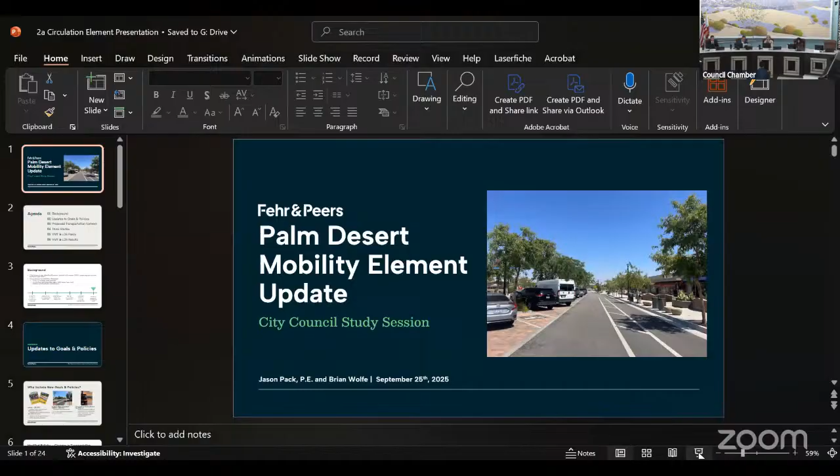Thank you, Madam Mayor, members of the City Council, Carlos Flores, Development Services. Before I turn it over to our consultant, Fehr & Peers, today you're going to receive another update on our circulation element update that started as of July of last year. The City Council has received a couple updates back in February as well as June, and then our Active Transportation Program Subcommittee reviewed some of the documents in front of you earlier this month. So I'm going to turn it over to Fehr & Peers to go over where we're at and some updates for y'all.

Awesome, thank you Carlos. Hello Council, my name is Brian Wolfe from Fehr & Peers, joined also with Jason Pack. We've been working with the city together over the last year on the mobility element update.

To give an overview of our presentation here today, we're really summing up our work over the last year on this effort, looking at the different improvements and alternatives as part of the transportation system. We're going to go over the key updates and changes to the goals and policies, and the mobility element will then touch on the changes to the transportation network, including some capital projects included in the long-term plan for the city. We'll also touch on truck routes, VMT, and level of service, which are three policy areas that are key to mobility.

For some background, we've been hard at work over the last year with the city, coming up with different alternatives to the transportation system, going through an extensive analysis looking at how this affects traffic congestion, vehicle miles traveled, and other key metrics. And now we're at the final stage where we're looking at CEQA and further adoption going into the fall.

There's three main motivators for this update to the mobility element. The first is really getting consistent and cleaning up a lot of the roadway cross sections. In the current mobility element there's some inconsistencies, and we want to provide a clean vision for long-term planning and potential roadway improvements in the city. Secondly, tying in all the recent plans that have been adopted, such as the ATP and the Vision Zero plan, and memorializing those in the mobility element. And finally, addressing those legislative requirements that have come out since 2016.

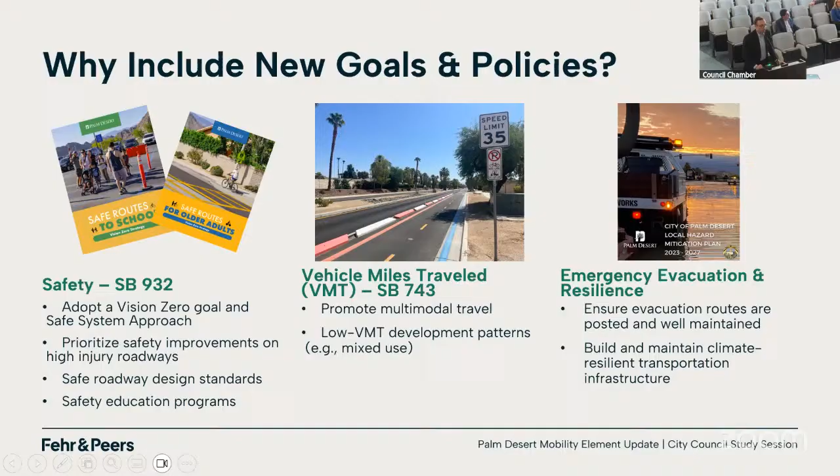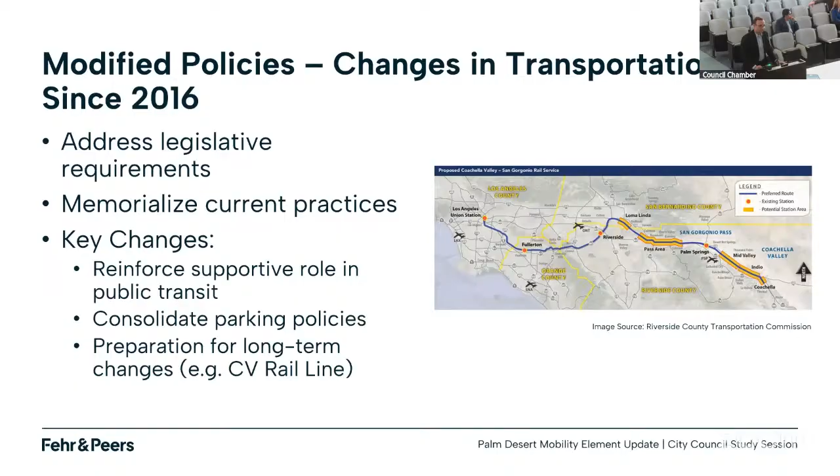Some other key changes to the transportation mobility element in the general plan, again, really just to address those legislative requirements and memorialize the current practices in the city. Some of the policies were outdated. Some of the key areas we wanted to upgrade were the public transit section, really reinforcing the city's supportive role in providing transit and connecting and coordinating with Sunline on that, consolidating some of the parking policies from the last mobility element, and then finally preparing for some of the long-term changes that we anticipate with transportation, including the CV rail line.

So next we'll jump into some of the key changes to the transportation network. This is the roadway system, the bike and pedestrian circulation, as well as truck routes. So first, why are we updating the transportation network? This is really an opportunity for us to review what the plan is in place for the city and help right-size our network for the future.

For example, we looked at some roadways that maybe were planned to be widened in the future. However, with current development patterns or changing priorities, including focus on walkability and downtown, this is an opportunity to right-size and update our plan accordingly. In addition, this is also a great opportunity to review some of those long-term projects, including the Portola interchange, which we've come to council on previously, and incorporate that as part of a long-term priority. We'll touch on that in a little bit. Also addressing some growth, and consistency with the state laws and policy goals that council has put forth.

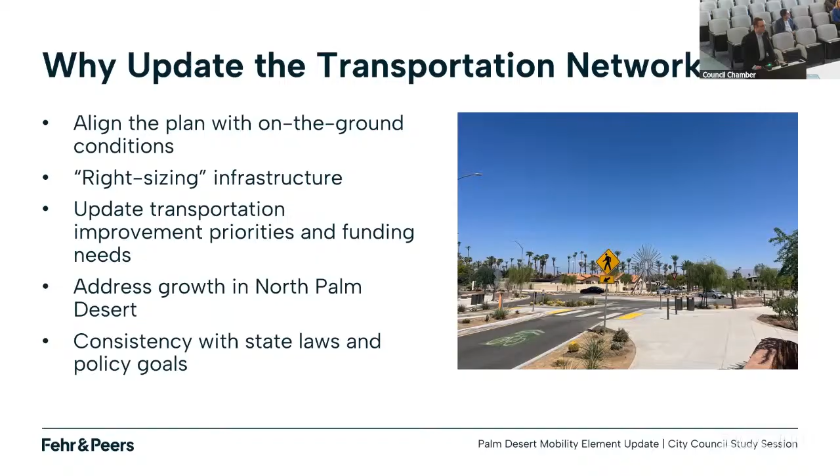So speaking of the Portola interchange, this is something we gave an update to council on in June. Just a reminder on the current status: all the design work, all the planning work has been completed, and there's just a need for additional funding to complete this long-desired project, which is looking at around $88 million in 2018 dollars. We did receive direction from council to include and continue this project as part of a long-term vision for transportation, so it is included in the draft updated mobility element here.

Some of the next steps as part of this, and that are incorporated into the action items in the mobility element, are just to review the cost estimates and costs for that project, as well as start pursuing and coordinating with agencies to find potential funding sources.

So why are we including the Portola interchange? As a reminder, it's an opportunity to help relieve congestion at Monterey and Cook Street. This is something we identified in our traffic modeling through the general plan update as a key priority, and this is one solution to address that. The next thing is really just to align with some of the state goals to reduce VMT, as it provides a more direct path of travel while also accommodating growth. And this is a project that is more likely to secure funding for improvements, as it reduces VMT and is in line with a lot of those state goals.

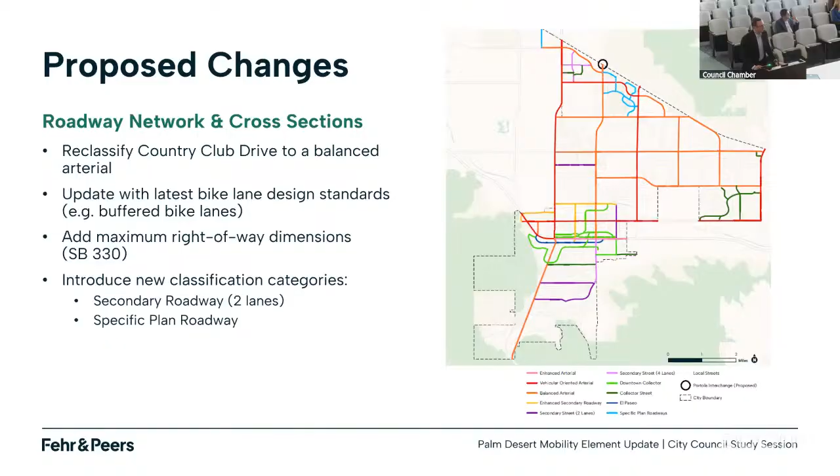So for Highway 111, we did look at potential improvements for this corridor. Based on the current mobility element that we're planning, the draft one that we have before you, there is a desire to provide complete street improvements along this roadway, including safety improvements for all users, potential for enhanced bike facilities, support for transit, as well as activating the frontage road. We have two potential design examples. These are very high-level planning, and it is the city's intention to refine the Highway 111 design further down the road through a more collaborative process with the community.

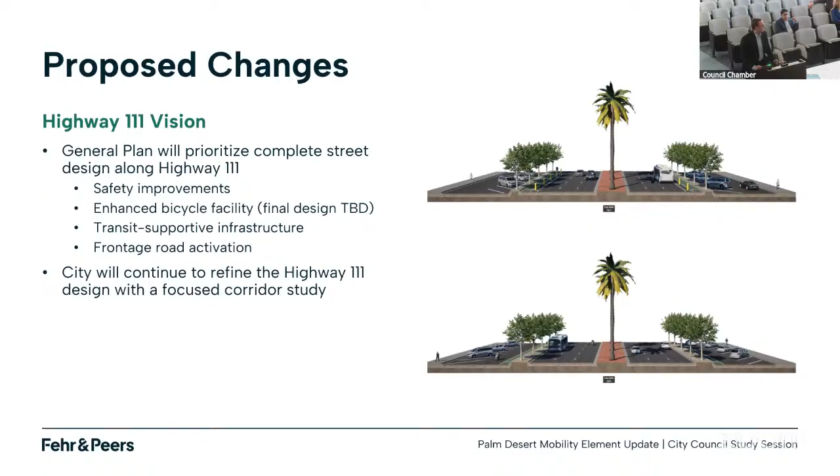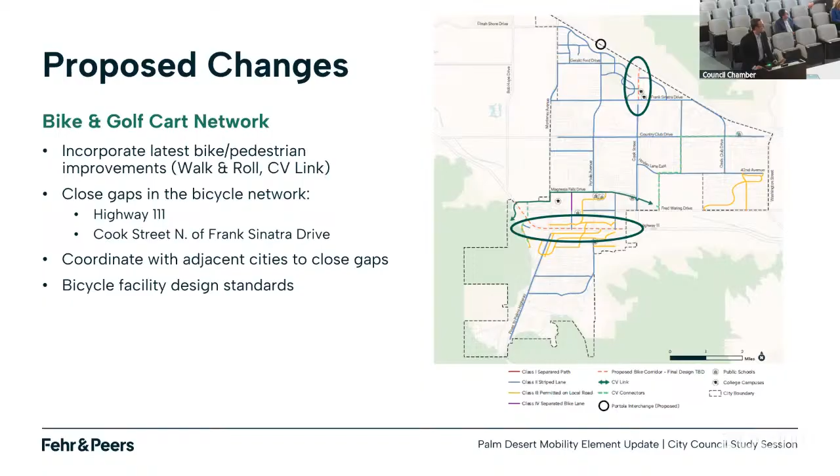Regarding bikes and golf carts, the focus of the mobility element update is to incorporate the latest progress since 2016, including all the new bike lanes that have gone in, CV Link, and other big projects, while also identifying the next gaps the city desires to close—specifically Highway 111, as well as Cook Street north of Frank Sinatra by the college, and the proposed rail station.

Our next topic is truck routes. This is a new topic area in the transportation mobility element, tied to new legislation, AB 98, which requires all agencies to adopt truck routes and incorporate them into their circulation element by 2028. This is a perfect opportunity to meet this new legislative requirement.

As far as where these routes should go, they should avoid sensitive receptors where possible, such as schools, parks, and housing. We did an extensive analysis of where these receptors are located and made changes to the truck route network. Some other changes are focused on addressing safety and past crash history with trucks specifically.

So the proposed changes—I'll list them here, and I also have a map on the next slide we can look at side by side. Some of the big changes are removing San Pablo Avenue; this was previously adopted by council but will be formalized in the mobility element with this update. Also removing SR 74 south of Highway 111, an area with a lot of crash history with trucks. Another change is removing Portola Avenue south of Frank Sinatra, where there are a lot of schools and other sensitive receptors.

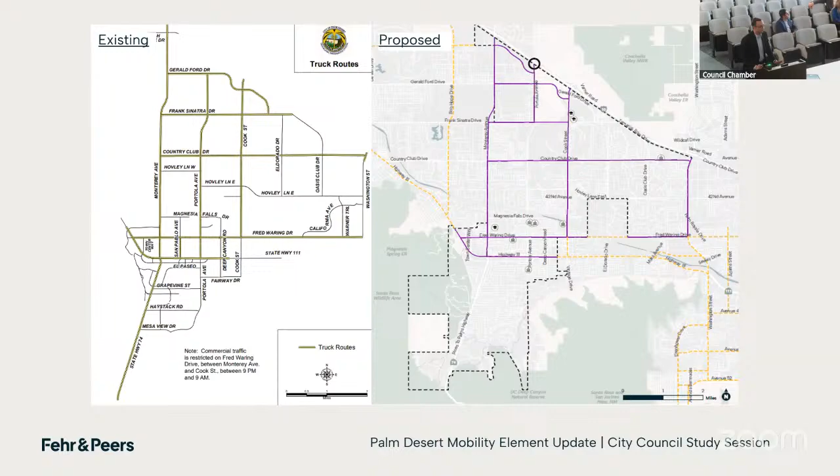This map shows the side-by-side existing and proposed truck route network. Again, those big changes are along Portola Avenue as well as SR 74 south of Highway 111. This network still provides some regional connectivity for trucks to navigate throughout the city.

Our final topic before we open it up to questions is related to VMT and LOS, everyone's favorite two acronyms in transportation. Why are we addressing these two metrics? They're really helpful for a lot of long-term planning decisions for the city, and they're also used extensively in the development review process.

First, level of service. This is a metric used to describe traffic conditions and help identify congestion hotspots. It's a local planning decision. It used to be incorporated in the CEQA process; however, it's no longer used in CEQA, but it is still being incorporated in the city's transportation study guidelines, which are part of the mobility element update. Level of service is a letter grade system based on average delay, and we use that information to help identify hotspots of congestion and potential improvements in the future.

With CEQA and the changes post SB 743, we have another metric called vehicle miles traveled, or VMT, which measures the overall efficiency of driving. It's essentially a sum of the total number of miles driven by vehicles—you can look at total VMT, the total amount of driving within a city, or the amount of VMT generated by a particular project. More often, it's looked at as an efficiency metric, VMT per resident or VMT per employee. This helps evaluate how potential changes to development or the transportation system influence how much or how long people drive, and it's now the new metric used for transportation impacts in CEQA.

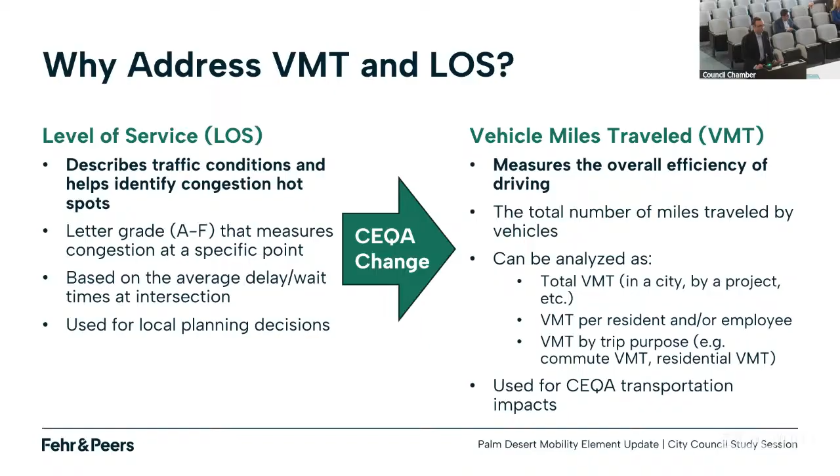So as far as this process, the mobility element provides an opportunity for the city to adopt city-specific VMT thresholds and guidelines. There are several key reasons why this is helpful. First is defensibility in the CEQA process. By having local guidelines, you're able to help streamline development in the city. This is also helpful to account for some unique uses, like our higher rate of tourism, so guidelines can reflect some of those unique development patterns.

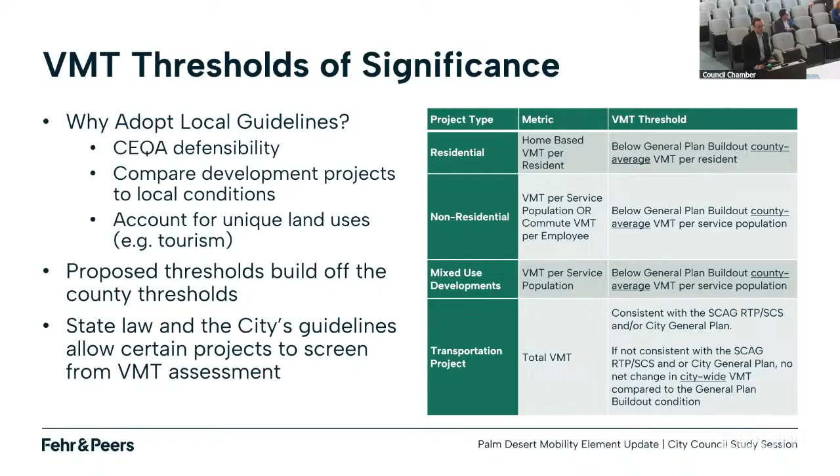A big thing to note about the VMT guidelines we're proposing is they build off the current practice the city is using, which is tiering from the county guidelines. So we're essentially memorializing that process for the city, while having a few slight clarifications on how to analyze more specific projects related to tourism and other cases. Also, state law provides opportunities to screen projects from VMT analysis, and those will be incorporated into the guidelines as well.

For level of service, now that LOS is a local planning decision, there is still a desire to maintain it in the city's plan, as it can help guide road improvement decisions. It's also an opportunity to help manage the existing transportation system and look at ways to invest in existing infrastructure and optimize the system before necessarily expanding roadways.

By and large, we're proposing to keep the LOS policy the same by having an LOS D threshold during the peak hour, meaning intersections should operate at a D grade, around 55 seconds of average delay or better. In the downtown area, shown there in orange, we do have some opportunity to provide flexibility by allowing an LOS E threshold, accepting a little more congestion where it's expected and where widening may not be feasible.

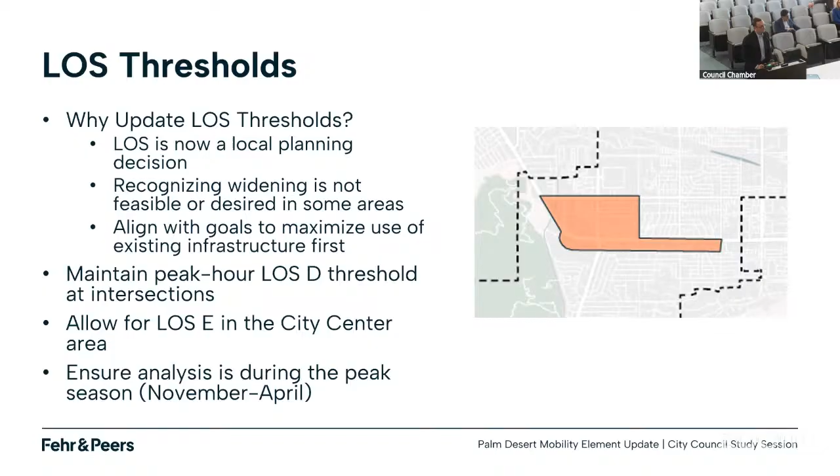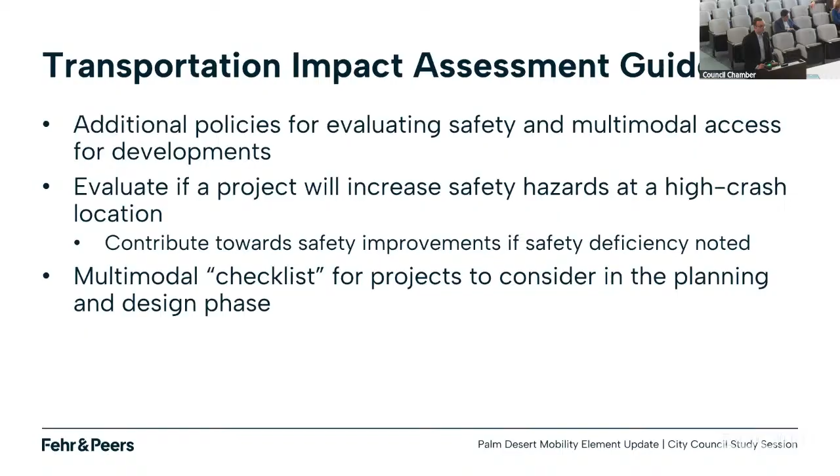Another opportunity with updating the transportation study guidelines is incorporating other goals and policies, specifically around safety and multimodal access. With safety, projects will evaluate whether they increase potential safety hazards and contribute improvements to the roadway system if they are found to increase those hazards, and also evaluate how bikes, pedestrians, and transit users would access future development.

The last slide here before next steps is how the mobility element update influences VMT and LOS within the city. With VMT, the proposed transportation improvements, most notably the Portola interchange, are found to reduce the overall amount of VMT taking place within the city. This is primarily due to shorter trip lengths—when you provide an additional freeway interchange, people have a more direct path to travel. We see around almost a 1 mile per person decrease in VMT as a result of these changes.

Next, with level of service and traffic congestion, we again see with the Portola interchange that traffic congestion improves at the Monterey and Cook interchanges, while also still accommodating planned development. One thing to note is that near the city center, we do still anticipate some congestion—it's currently there now and probably expected to grow a bit in the future. We recognize that widening may not be feasible or even desired in this location.

So next steps: we're currently working through the CEQA process. Most notably, we're consulting with adjacent tribes about the potential changes taking place with the mobility element. That effort is wrapping up soon.

Our next step is to go through formal adoption with council, adopting both the updated mobility element—which includes the goals and policies, as well as the roadway reclassifications and truck routes—and along with that, the transportation study guidelines, including the VMT thresholds, level of service thresholds, and other safety and multimodal assessment processes.

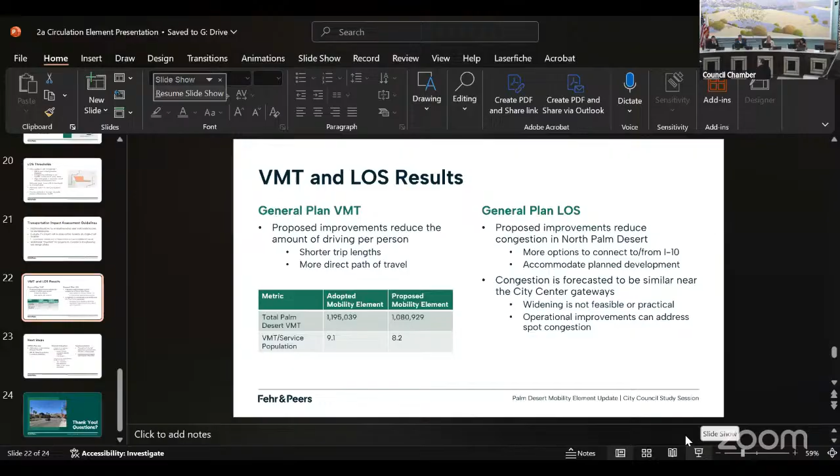Do you have another question? Yeah, one other question - the slide right before next steps. In terms of results we're coming up with for helping with VMT and the LOS, it seems like we're relying on the Portola interchange to resolve a lot of this.

Correct, yes. And in 2018 it was 88 million, so we've had inflation. I'm going to say that number could well be 130, 140 million. The last time we talked about it at any of the CVAG, it's maybe more than 150. So we're at a loss, as far as I know, on how to get funding for this project.

The city itself - unless I'm missing something, I could ask our city manager or our finance director - but it's a dream right now and not a solution.

Yeah, and as we heard from council in June, it is one of those dream projects, and that's why our discussions with city staff have found it valuable to include in the mobility element as a long-term priority. When the project is in the mobility element, it's very clear the city wants this project, and it makes it easier to go after those potential funding opportunities. So one kind of has to come before the other, and we lay out implementation actions so the city can focus on finding opportunities to engage with CVAG, RCTC, and other state and even federal representatives about funding for this project.

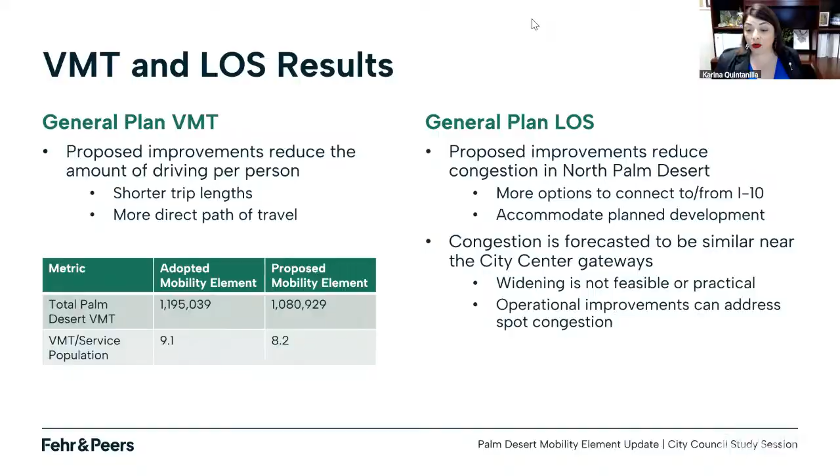Thank you. And I know Councilmember Quintanilla, you had put your hand up. Yes, thank you, Madam Mayor. Just two quick questions. One, what is the weight threshold to have these restrictions apply to trucks? I don't know that number off the top of my head, unfortunately. I don't know if Jason does.

I'm sorry. And the other one in the meantime is how are you collecting the data on how long it takes for a car? Are you using the CV Sync data, or how are you collecting the time that cars are waiting? The travel time?

Yeah, so a lot of that is based off of established analysis formulas in the transportation planning practice. So as part of this effort, we collected a lot of traffic data. How many people are driving on the road, and we use that information to assess how well the system is performing and estimating that average delay. So, and that does incorporate the CV Sync effort that is underway. So any of those improvements, we did see some notable improvements in travel time.

So just to answer your question about truck routes, one of the ways to address truck routes would be to enforce a weight restriction on roadways. In fact, I'd suggest most of the agencies that we're working with are finding that as the easiest way to enforce trucks. So that weight restriction can vary depending on the type of truck that you're trying to restrict on a specific roadway. So if you want a single unit, like a moving truck, to have access for local deliveries, that weight would be very different than a semi-tractor trailer, for example. So that weight can vary depending on the type of truck.

We're bringing you today a presentation on a median landscape master plan. This master plan is one of the council goals for 2025, and staff have contracted with Herman Design Group to start putting together designs. What you'll see today has already been presented to the Architectural Review Committee with some positive feedback and additional changes made as a result. We're bringing it to you today as a first pass, so we're looking for your feedback on the plant material included, the aesthetics provided through the master plan, some of the aggregate material used, and just the overall look and feel.

I want to mention we do have a slide on funding for the plan. I'll jump back in when our consultant gets to that slide because I want to talk through some options. But without further ado, I'd like to introduce Opus Garza from Herman Design Group, a senior planner who will give the presentation.

Good afternoon, thank you for the time to present our design to you. My name is Armando Opus Garza, an associate with Herman Design Group. With me today is our senior designer, Francisco Sanchez. So, the Palm Desert Median Master Plan—we were tasked with providing a new landscape identity for the city of Palm Desert, something that will help you stand out amongst the rest of the Coachella Valley, and something that gives your residents and visitors a sense of arrival as they're coming in, whether from the I-10 or from neighboring cities to the east or west.

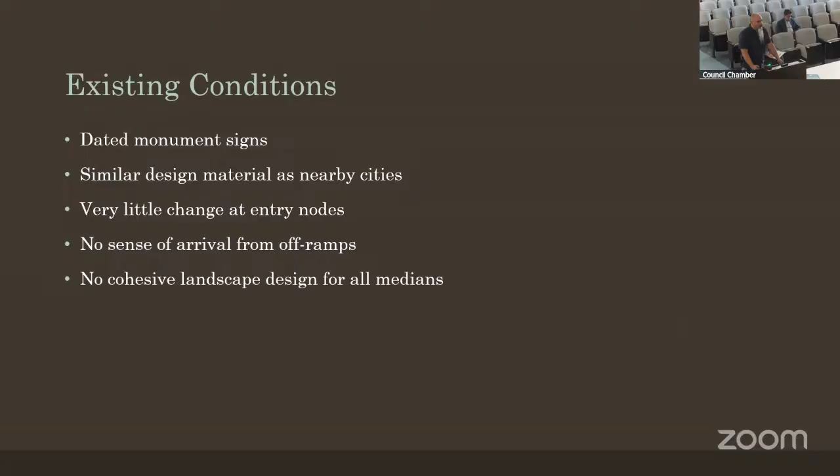We worked closely with city staff to identify existing conditions—things we'd like to change, things we'd like to keep, and things we can work with. Some of the existing conditions right now are dated monument signs, designed with different materials like stone and steel. You have similar design materials as nearby cities in terms of rock, the river cobble layout and ground cover. There's very little change in the entry nodes coming from different cities, unless other cities have a very lush landscape design, and there's no sense of arrival coming in off the main on and off ramps—Monterey, Washington, and Cook. Overall, there's no cohesive landscape design in these medians.

So some design opportunities that we've identified. We'd like to keep the existing specimen plants, the trees, accent plants that have taken a long time to become established. We don't want to go in and just rip all this stuff out. So some of the stuff that looks really good and it's taken a while to grow in place, we want to keep that.

You have median rock blankets at the nodes of all the medians. We want to keep that in place where it makes sense and where it meets our design standard. We'd like to remove all the existing stamped concrete. And then we'd like to use the Natina spray, which is a staining material to help bring some cohesion to some of the gravel, crushed rock blankets, and boulders to bring them all into a cohesive design.

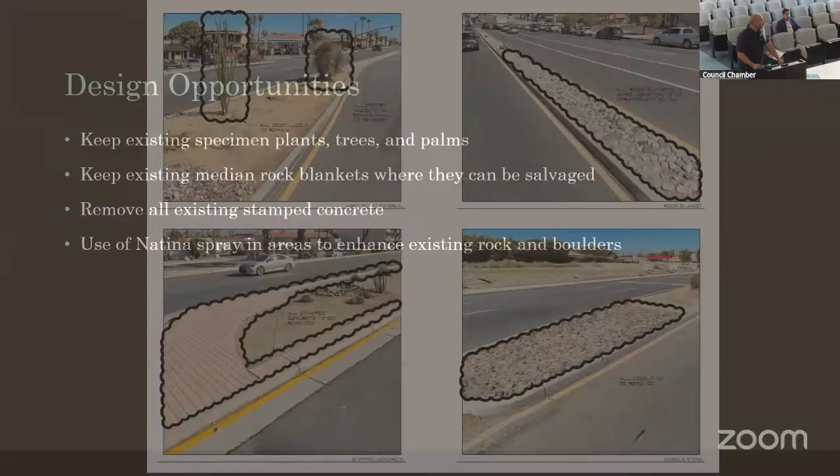Here's an example of your existing conditions. On the top left, you can see the shrub material and ground cover is very dated and well over maturity, so we'd like to rip it out. And then the yuccas, the ocotillos that have taken a while to grow in place and really look spectacular, we want to keep those.

On the upper right, this is a crushed rock blanket. We can keep this in place and then spray this with a Natina to give it a little bit of pop and bring it into a more organic color that's going to match up with the new rock that we're proposing.

Bottom left, that's your stamped concrete that we'd like to remove. And then the bottom right is a rock blanket that was installed with a cobble design, a smooth river wash cobble that doesn't meet the new design that we have laid out, so we'd like to rip that out.

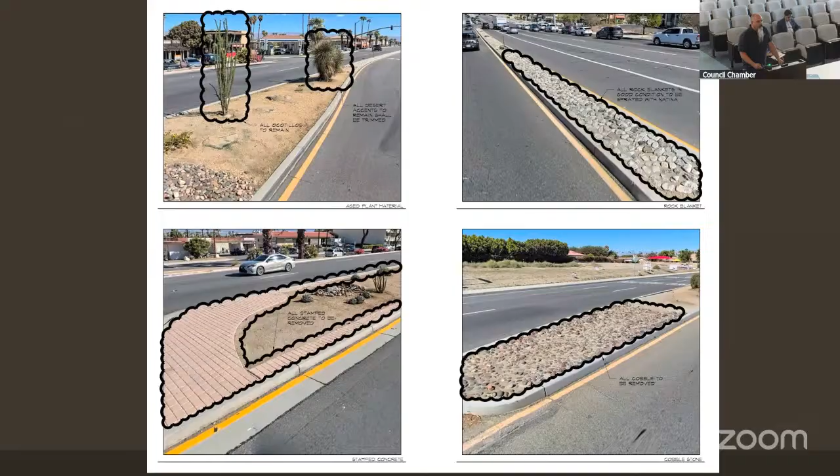New design elements. Our inspiration comes from the San Jacinto Mountains, the color and silhouette that you see, and the up and down pattern as you're coming in off of Monterey, where you're coming down 111, you're getting a really striking view of those mountains. So we're trying to replicate that in our landscape design.

We have three different levels of design tiers, and this is based on the vehicle speed and density. It's taken quite a few weeks for the city to help us out and our design team to drive through most of these roads to get a sense of what the traffic looks like, how fast are you going, how often are you stopping, and really getting a chance to enjoy the landscape and the surrounding buildings around you.

So we've broken those down into three tiers, tier 1 being densely planted and designed, tier 3 being the less densely designed, and then tier 2 being somewhere in between.

We have unique plant selections and hybrids that we'd like to propose that's going to help you break away from the desert norms that Coachella Valley seems to be doing, where, for example, it's the same bougainvillea used city by city, which is the Barbara Karst. So we'd like to bring in a hybrid version that's going to give you some different color, still provide year-round color, but a different foliage type and a different flower type.

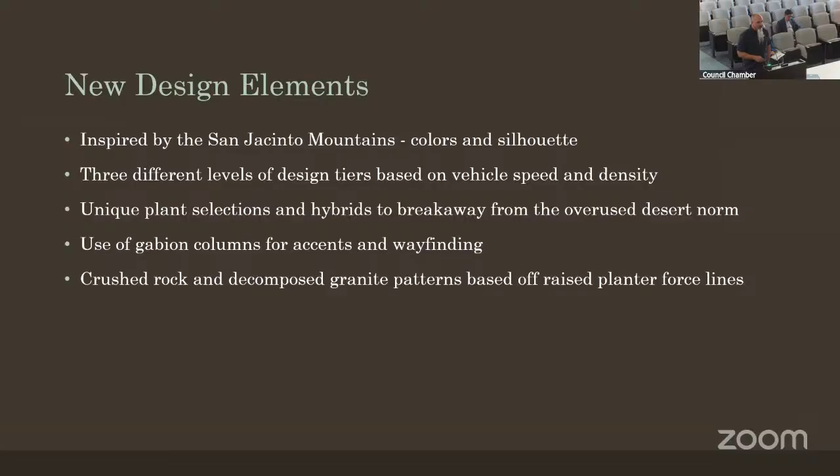Here's a map of the overall master plan. You'll see on the right the tier 1 examples and then a legend on the bottom. Tier 1 is our color green. That is our most densely planted and most use of the raised planters. We have retaining boulders used in there, and then we are using gabion columns at entry portions, so Monterey, portions of maybe Country Club, and then in downtown settings near 111 and El Paseo.

In tier 2, this is the color blue. This is where we're going to pull back on some of the raised planters, some of the retaining boulders, but we'll still be using highly dense clusters of colorful plants, but we'll pull back some of the plant spacing a little bit.

And then at tier 3, we're pulling a lot of the hardscape elements out. We won't have any gabion columns, we won't have any of the raised planters, no retaining boulders, and we'll rely a little bit more on the accent planting and the existing material that's already matured.

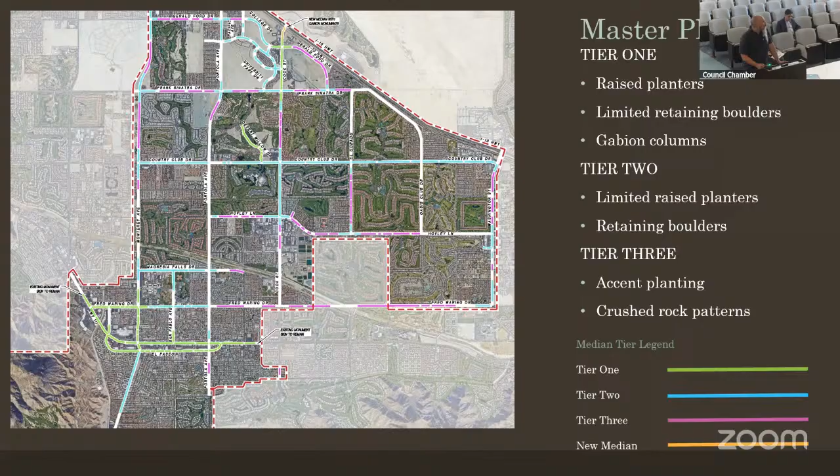With these columns, we have several different lighting options. I'll show you those in the renderings.

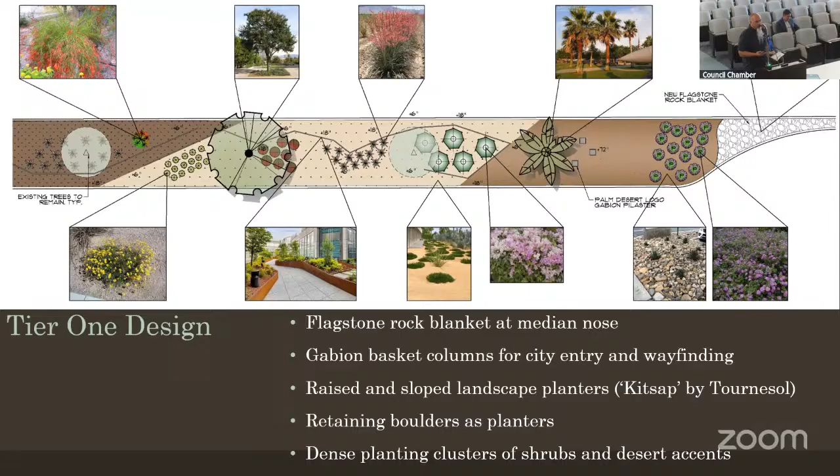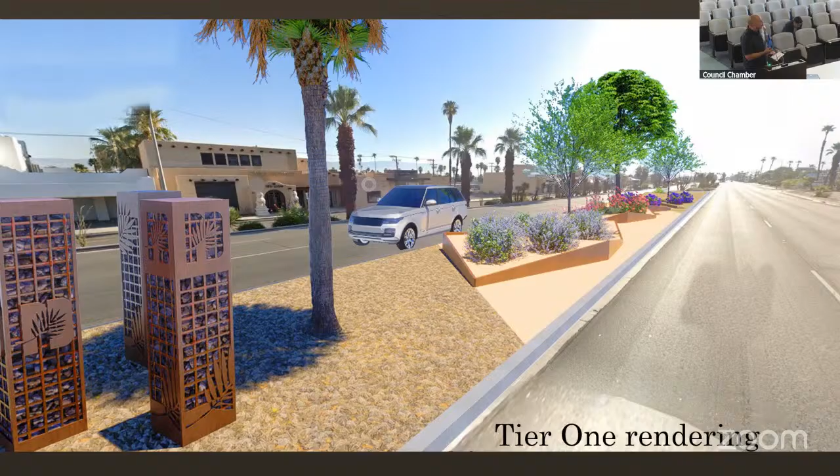Here's our rendering. You can see the columns and then the way the crushed gravel comes in and the variety of heights that we have on the raised planters, and then the kind of mass groupings of the colorful plant material that we have.

Our tier 2 design - this is where we're going to kind of back away from some of the hardscape elements in terms of the raised planters.

Using a little bit more of the retaining boulders, and then we'll back off of some of the highly dense and clustered planters or plants.

We'll still use the same material, but we'll pull away on the on-center planting and go for a little bit more of a sparse design. No gabions used in Tier 2.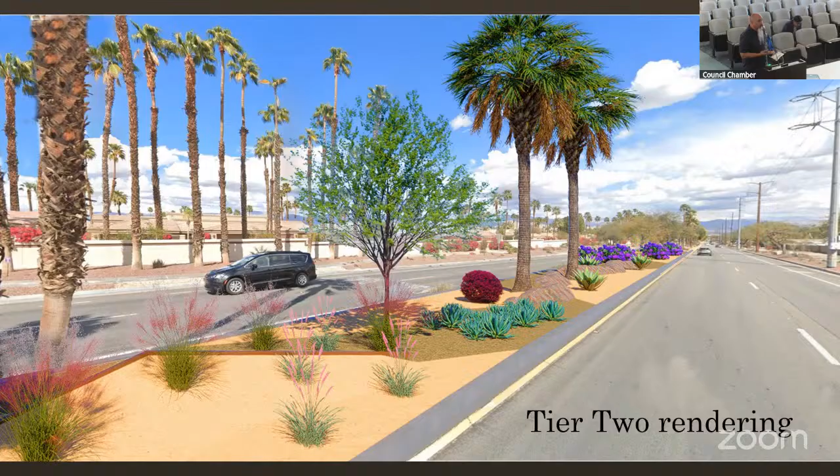Tier 3 design. We're pulling away from all the hardscape elements that we had in Tier 1 and Tier 2. We're going to have no gabion, no raised planters, no retaining boulders. We'll have groupings of boulders, and we still will have the rock layout based on geometric forms as to where these raised planters would have been, creating these force lines, and a much more sparse design on the landscape, pulling well away from the heavily dense clusters.

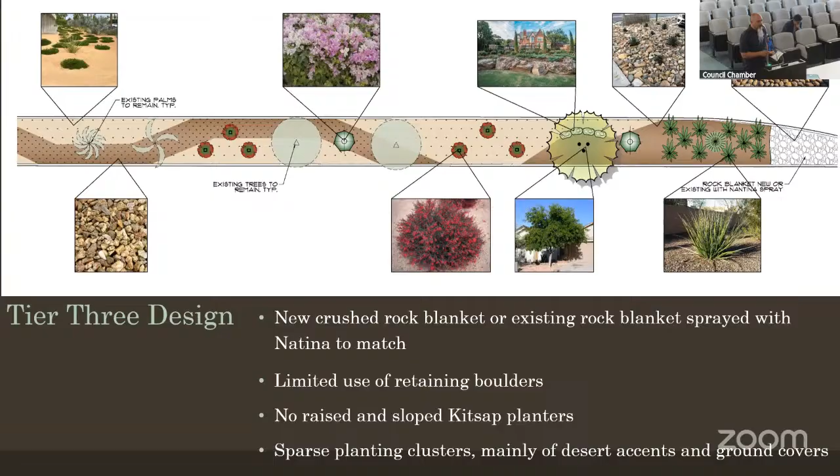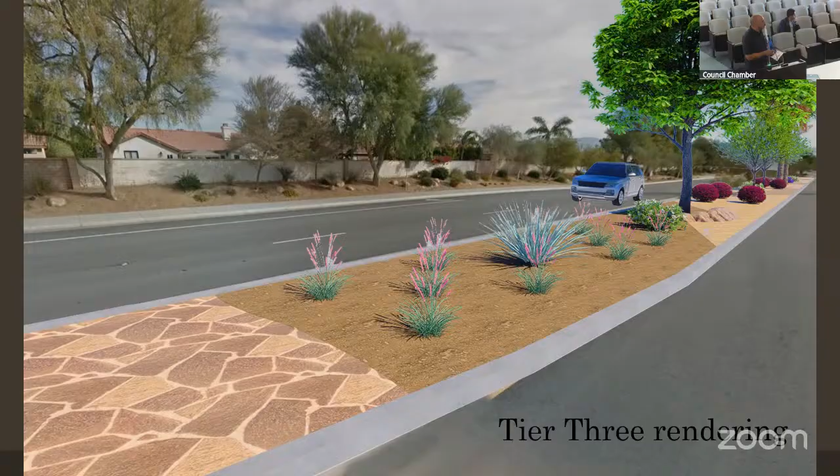New entry median designs. Medians will be added to the on and off ramps at Monterey, Cook Street, and Washington Street. We have no plants or irrigation proposed in these medians. We want to use these raised planters as a fully retained system, retaining on 3 sides and then fading down back to finished grade. We'll use a crushed rock in the same patterns based on the raised planter force lines, and then gabion columns for signage and as accents.

We also are proposing the metal plant sculpture designs and an art node for future sculpture locations. The entry median gabion columns will have the same style of design, but we want to create a variety of height options, giving you the opportunity of welcome or leaving Palm Desert, depending on the flow of traffic.

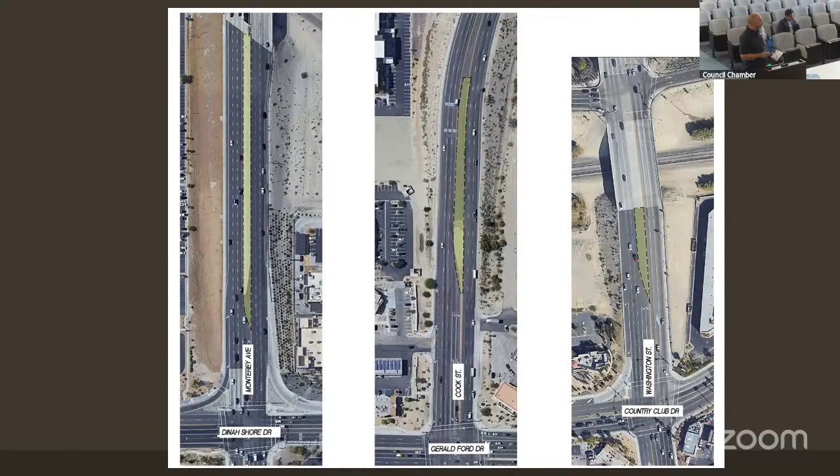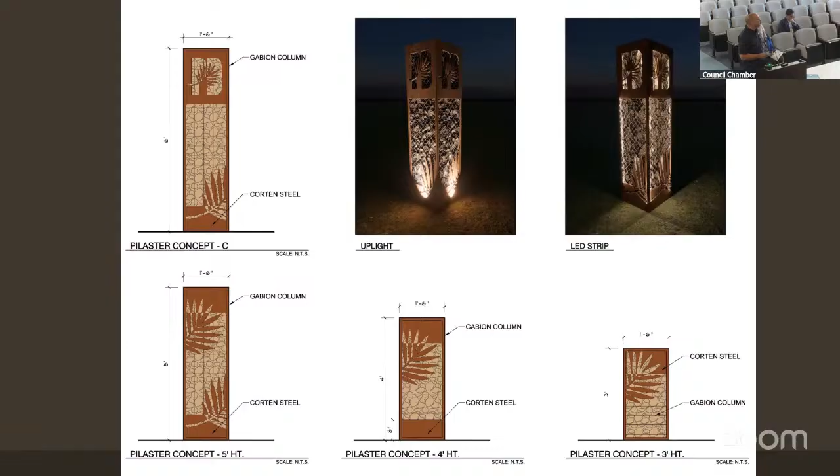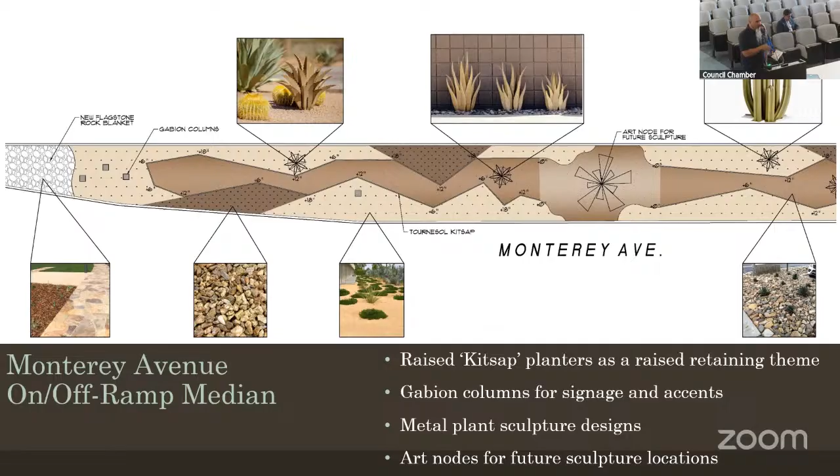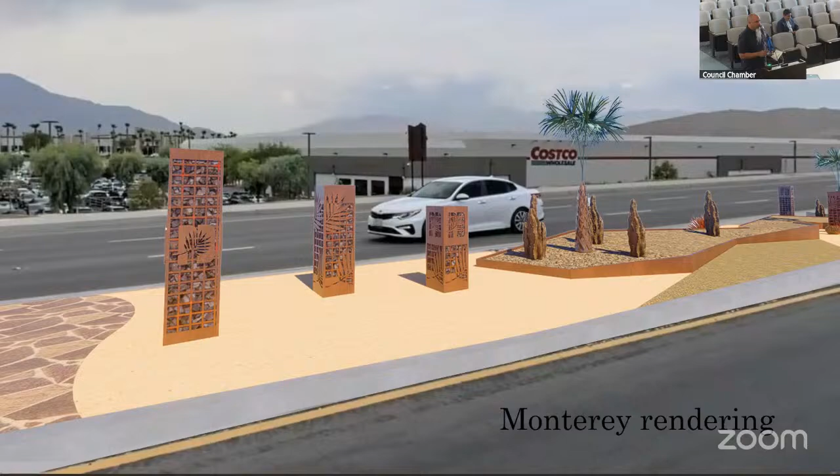And here is a rendering of that design. Gravel still pulling off of the force lines of the retaining walls, and then your metal plant sculptures.

Cook Street, very similar design, same style, same aspects of the metal plant sculptures, and then the retaining walls doing the same thing, having an art node in the middle and acting as a point of reference for the start and stop of the retaining walls.

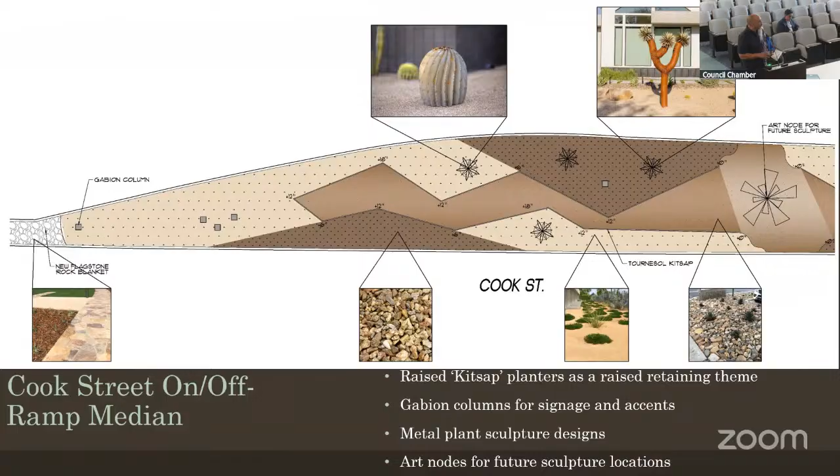So here's a rendering of that, where you can more clearly see where the art node and the sculptures are happening.

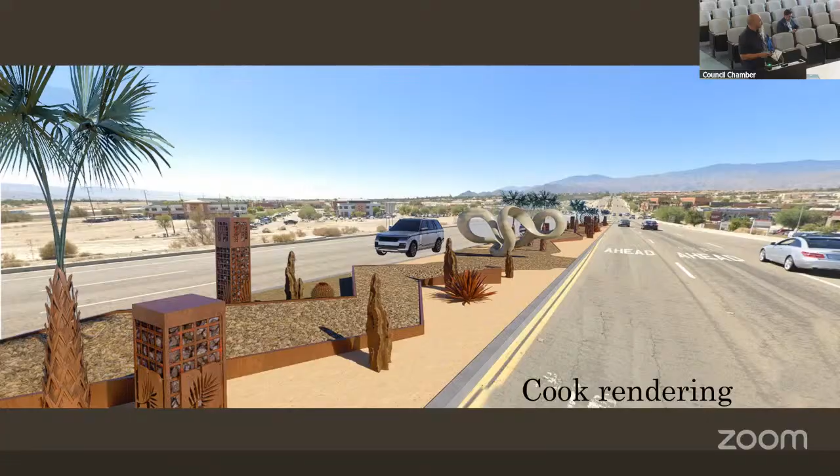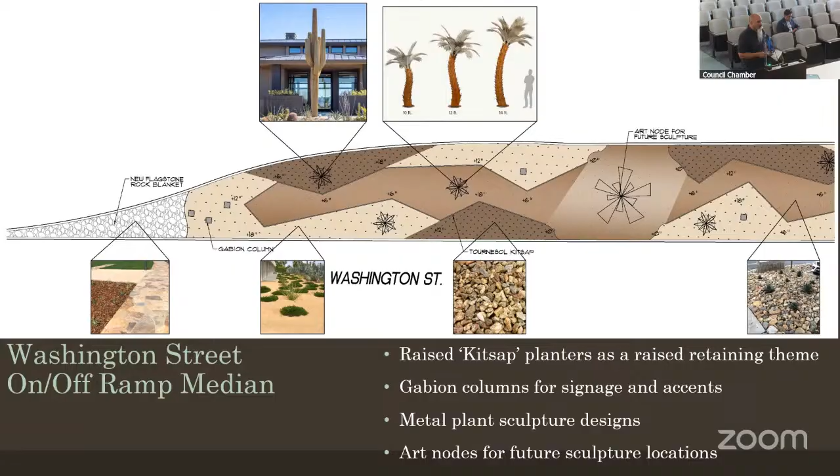Washington Street, a much smaller design, but still giving us an opportunity to create an art sculpture node, with the same design theme as the other two. And here is a rendering of that one.

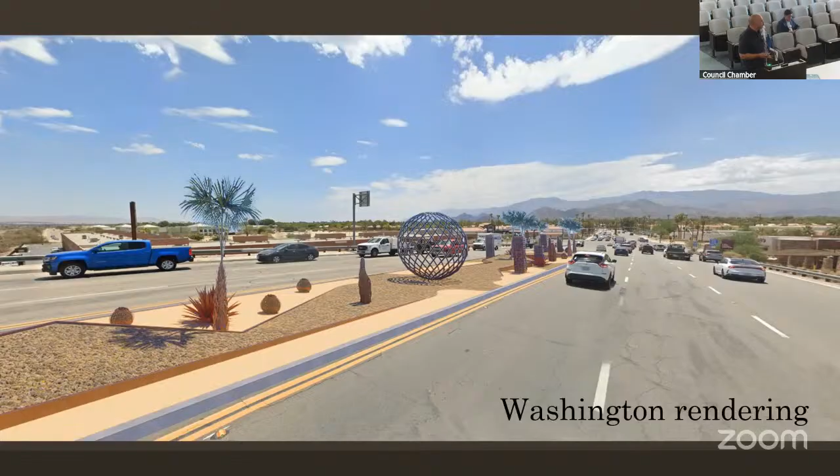So city asked us to put together this budget for a 5-year plan. This is considering Tier 1 and Tier 2 only.

Yeah, so I just wanted to jump in here because this is a preliminary presentation that we've put together for you today, and this is one option. We said we were going to put together a 5-year median landscape master plan, and this is what that would look like in a 5-year snapshot. The total is approximately $30 million. This is not included in the current capital budget, and that's something we're going to be working on and presenting in the future with some alternatives. Some of those include a reserve study that finance is doing that will potentially identify some funding opportunities, and some capital projects that have been deferred or are going to be delayed, where we can utilize funding there.

So we'll put together a separate presentation and come back once we've heard your input on the landscape designs, come back with some funding mechanisms, and then the final draft designs before we move forward with the plan.

I think we have one more slide, but I can speak to that too. The Public Works Department does have several landscape companies on call for task orders to complete these smaller projects as rehabilitation projects, not complete overhauls. In these smaller portions of the city where we can get this plant palette up to speed quickly, we'll be utilizing the task orders and the operations budget to accomplish that.

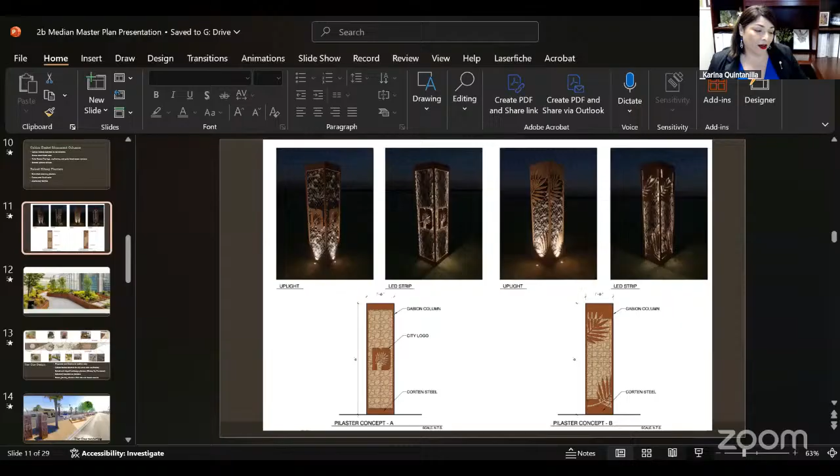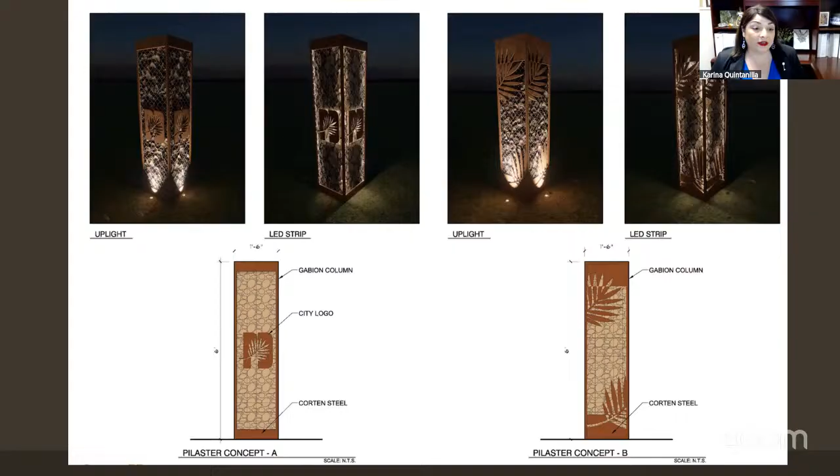While it gets pulled up, for example, in one of the designs, the City of Palm Desert logo, which we're very proud of and it makes us distinct, it doesn't shine through very well when you're driving through at night. And if that's part of the intent to have it be a welcoming sign, I think that we need to look at the possibility of combining both the internal LED and the uplighting to have as much of it come from all sides, because some of the areas where there will be the entry, it's kind of vacant in the area and there isn't a lot to keep shining light. So I'm wondering if we can look at having the combination of the LED and the uplighting to maximize the lighting. So that's my question or my last thought on that.

Okay, thank you. I know we're, did you have something? Yeah, sorry. Please go. I want to let you have the last say.

So, yeah, I do have one comment is, actually, I'm going to go in contrast to Gina and my colleague Joe's comments. I actually prefer less landscaping. I see landscaping as just upkeep in the future and kind of more expense, more headaches, more problems. And if you can, I thought the designs were pretty that didn't include any green or landscaping, so that's my opinion, my 2 cents. Thank you.

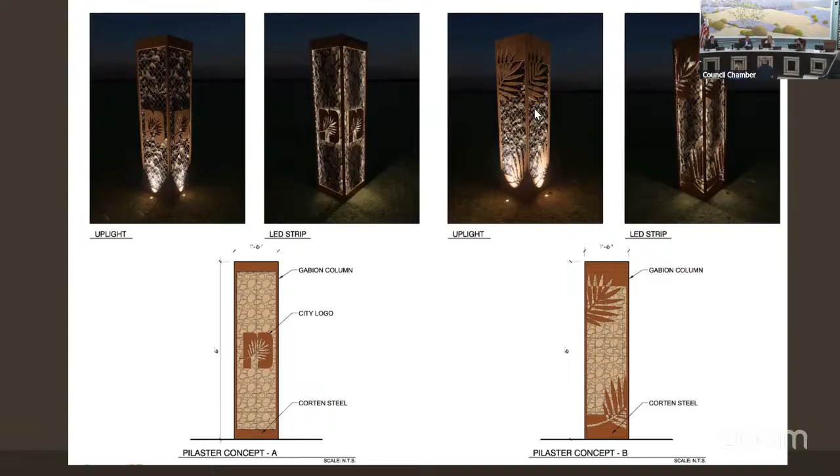Thank you. And I think we're well aware that this is a study session and we're just providing general guidance. I think your designs are wonderful. Everything I've seen is really attractive. Knowing the cost of working with CVWD to move water, that sometimes becomes prohibitive. And then the ongoing cost keeps it there.

So we need to look at it, and I do agree with Mayor Pro Tem Truby. Those were beautiful and architecturally very clean and striking. And when we think about it, I would encourage my colleagues, next time you get off of the freeway, to note that you're elevated. So what you're looking at is the entirety of Palm Desert. You look to the other mountains, so you see an awful lot. So I don't know that we are so dependent on greenery right there

as we see the beauty of the mountains, we see the beauty of the entire valley. So I'm not sure that our return is so great if we put the greenery right when we're coming off the freeway. So we've given you lots of mixed messages, lots of mixed direction, and I know you'll find a way to power through. So thank you so much for all your work on this.